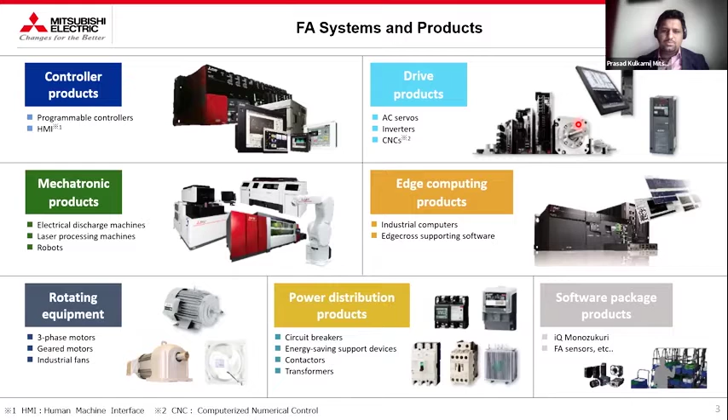Talking about manufacturing in the digital transformation era, there is a lot of advancement happening in the industry. If you look at sensing, there are various stages, right? When you collect data, the first level is the collection of the data. Then you have to communicate that collected data to some data destination. Then you have to process the data, and analyze the captured data, and extract meaningful information from whatever data you have captured. So there's a lot of advancement happening in each stage.

If you look back, let's say 10 years back, we used to sense data using some real-time sensor like a pressure transmitter, flow transmitter, that used to give some 4-20 milliampere output, and that used to go to the PLC, and then we used to visualize the data on HMI or SCADA. But today there are some sensors available in the market which not only sense the data, but also push the data into some IoT platform - it pushes data to the cloud platform. So that kind of advancement has happened today.

If I want to talk about high-speed communication, there's a lot of advancement also happening there. If you look back, there are standard communications like Modbus, Profinet, Profibus, something like that. But today, on top of this communication, there is an additional communication network technology available, that is TSN. TSN is basically time sensitive network, which talks about time synchronization, data sharing, handling that huge data into a number of packets so that data can flow without any hassle.

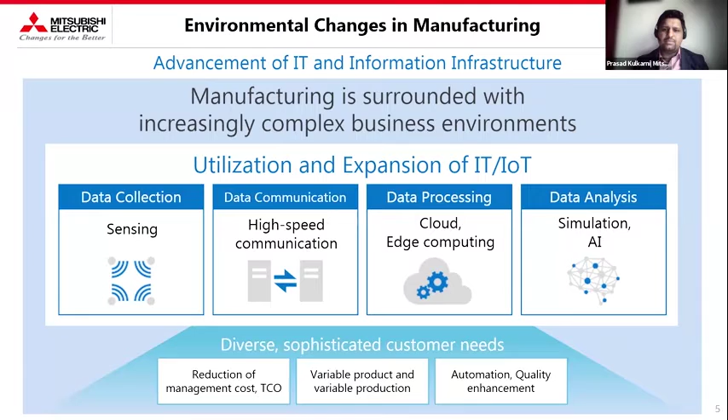Talking about manufacturing challenges, as an automation solution provider, we see there are a lot of manufacturing challenges, but we have categorized those challenges into three main parts. One is the non-standard processes and user interfaces.

We have seen data connectivity losses. We want to provide a solution which will give you seamless data connectivity, whether your existing systems are new or old, legacy systems, whether they have a standard protocol or non-standard protocol. So irrespective of your existing system data source, we have a ready-made solution which can just plug and connect to the existing data source and capture the data.

Then the second challenge is about labor shortage. When we say labor shortage, it is basically about skilled labor. We have seen in manufacturing there are various lines where humans are working, and that kind of job can also be handled by robots. So we ensure this repetitive task can be replaced by robots and cobots. We have those kinds of robotic solutions which can handle this kind of challenge.

Then we have seen another challenge, that is passing down long established skills. We have seen on a shop floor there are some devices or equipment which are handled by very skillful laborers, and if that particular skillful laborer leaves the job or leaves the organization, then his knowledge doesn't get passed to the next person who is available on the shop floor. So that is one challenge we have seen.

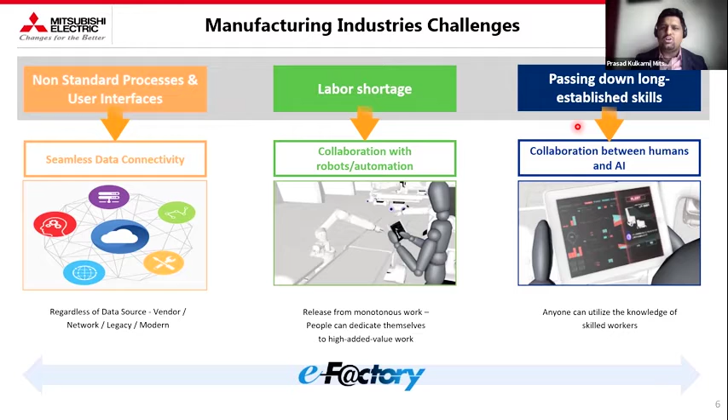So we have come up with a solution that can take care of all these challenges, and we call it a complete e-factory solution. Now let's try to see what is basically Mitsubishi Electric's solution for manufacturing.

And when we say e-factory, in simple words, I would like to explain what e-factory is. E-factory is a comprehensive solution that leverages the latest digital technology like big data, IoT, edge analytics, advanced robotic solutions, and simulation software solutions, and we try to build a technological ecosystem that helps our customer achieve digital transformation in their manufacturing environment. So that's all about e-factory as a solution, as a definition.

We launched this concept way back in 2003, and as the technology is emerging year by year, we are also trying to evolve our e-factory concept. On the right hand side, you can see this is our general architecture of e-factory, which touches upon various aspects of manufacturing: one is basically the shop floor, then there is edge computing and the IT system.

You can very well correlate this architecture with the ISA 95 architecture, which also talks about level 0, 1, 2, 3, and 4. Level 0 basically talks about sensing the physical parameters. Level 1 basically talks about controlling those parameters. Level 2 is basically visualizing, level 3 is about manufacturing execution, and level 4 is the ERP.

So when we offer e-factory solution, we also touch upon all these aspects, and over the period of time we have also realized that Mitsubishi alone cannot offer each and every solution. So for that we have our partner ecosystem. Using that partner ecosystem, we have made various categories: one is a software category, device category, and SI category.

And whenever we offer our e-factory solution, we try to keep our solution as standard as possible. So whether it is level 1, level 2, or level 3, we try to keep our solution as standard as possible, and we try to use only standard products.

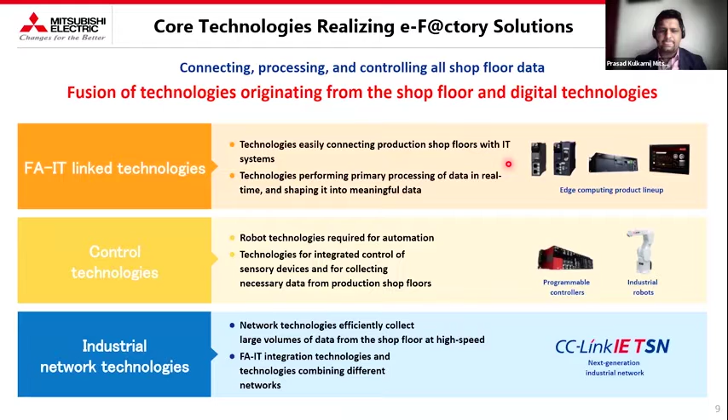So this is overall e-factory architecture. You can see this is production shop floor. At each and every level, we use our e-factory concept. There are some devices and equipments where we have implemented AI using our edge computing product, powered by a software called Edgecross. This e-factory concept can be implemented for one plant or for multiple plants.

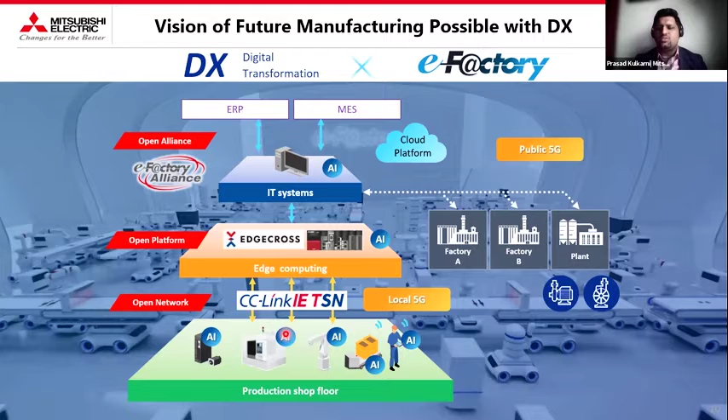Now talking about overall value proposition, what we offer as an automation solution provider or e-factory solution provider: we take care of complete manufacturing operation management. We have solutions like augmented reality and digital twin, edge analytics, and advanced robotic solutions. This is about our overall solution capabilities.

So you can imagine this is any manufacturing shop floor that may have various factory automation devices or systems. These systems could be from different automation suppliers - it could be Mitsubishi, Siemens, Schneider, Omron, Rockwell. But irrespective of existing data source, existing automation system, or existing communication protocol, there are ways to capture the data.

So we have two ways to capture the data: one is using a data collector, that is the hardware gateway, and second is through the software gateway. Based on the customer's existing infrastructure, we decide which hardware gateway or data collector needs to be used, and we capture the data.

Once we capture the data, we have a complete software platform called ICONICS Suite, which has a bunch of softwares that take care of dashboards, reporting, equipment integration, production planning and control, quality management, material management, equipment logbook, traceability, augmented reality and digital twin, and similar solutions. We also have edge analytics powered by our product called MELIPC MI5000.

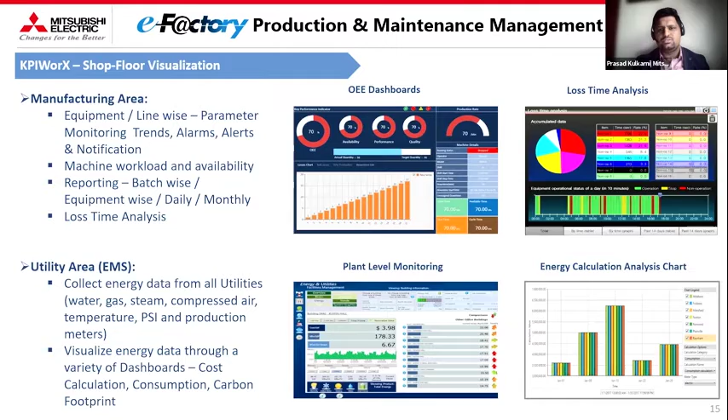We also have quality analytics products, which is basically a real-time statistical process control tool with a gamut of SPC calculation charts through which we can know whether my existing process is within threshold. It has various features like interactive charting, so if you are monitoring graphs, you can zoom, pan, scroll, or add comments if there is any deviation. Then there are certain SPC rules for alarming purposes.

Combined dashboards are there; those dashboards can be developed for the operator or for the management. It also has complete logic and workflow. The data can be merged into any enterprise system. It has universal connectivity, and it also supports complete scalability.

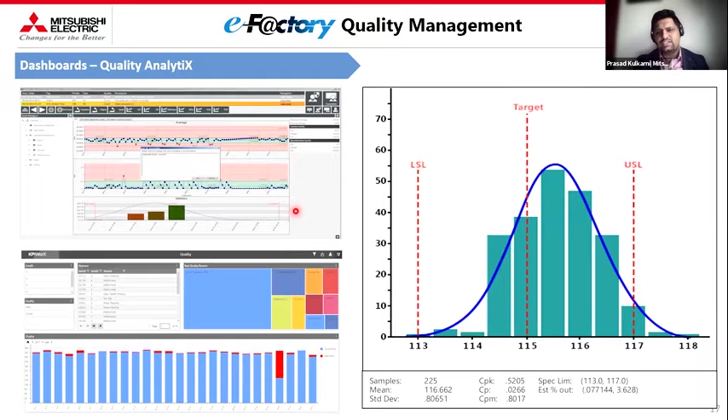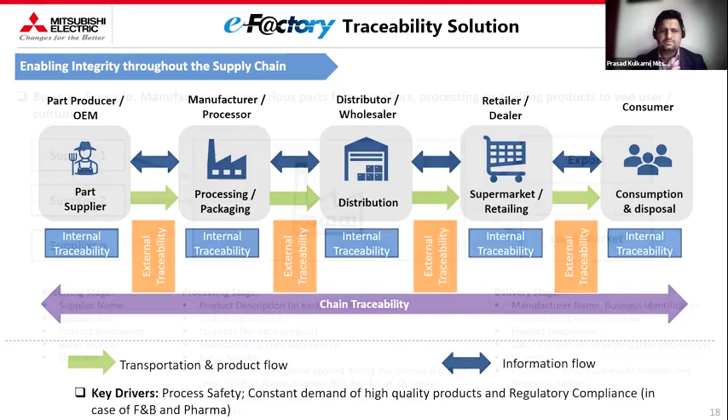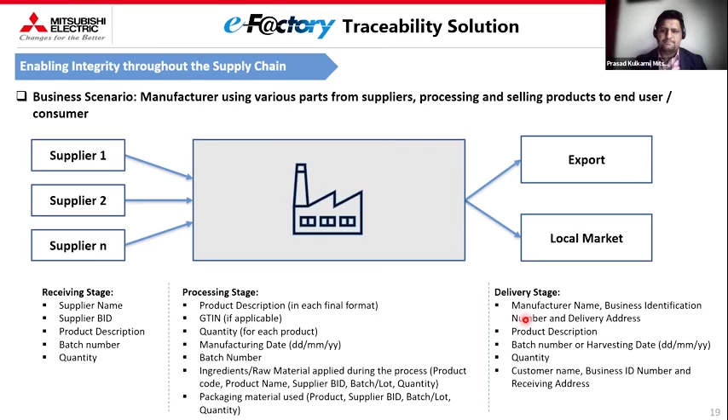Yeah, Mr. Prasad, we are running short of time. Yeah, I'm about to conclude my presentation.

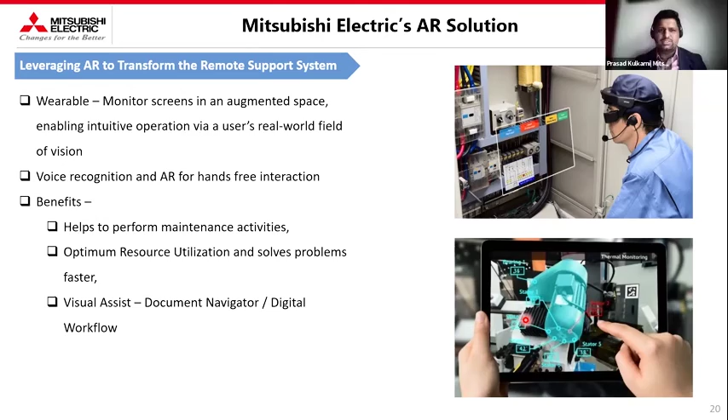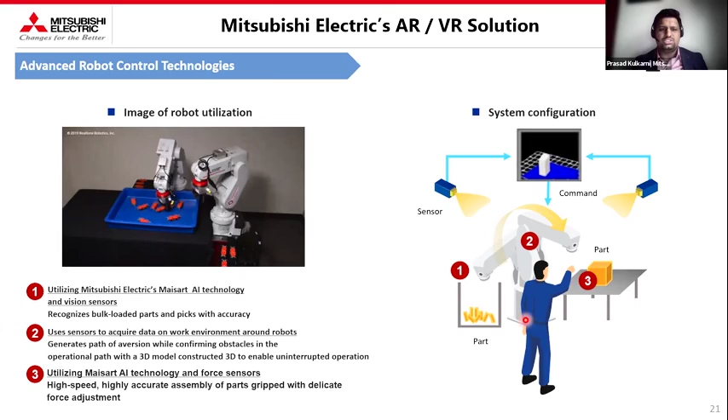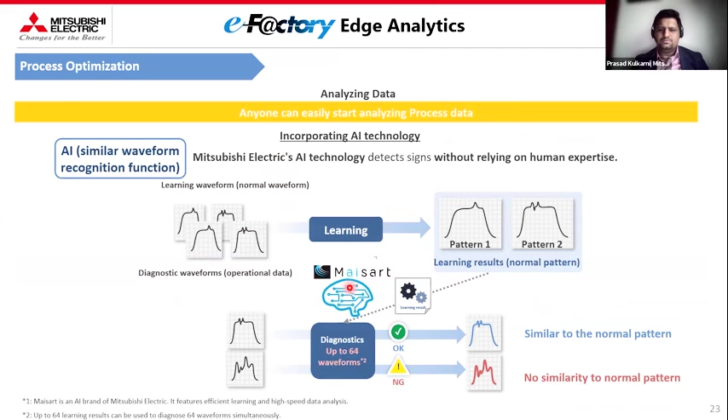Then Edgecross, which is basically about process optimization. The technology we use is Maisart, Mitsubishi's proprietary AI technology, where we use a similar waveform recognition function which basically learns the data and tries to detect anomalies, along with a few MT methods and MLR methods.